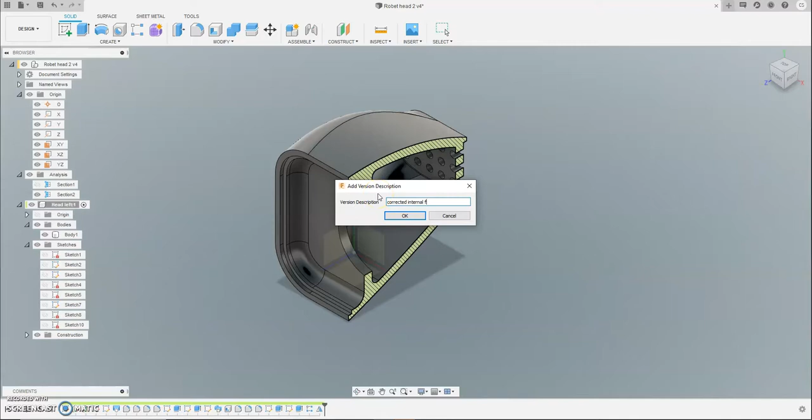Okay, so what I'm going to do now, if I look at my sketches, I understand you can't see them, but I'll put them up in a video, or perhaps as an attachment, I'll put the actual two-dimensional paper sketches on to show you, so you can have a look at what I'm doing as I'm doing it, and hopefully make a bit more sense.

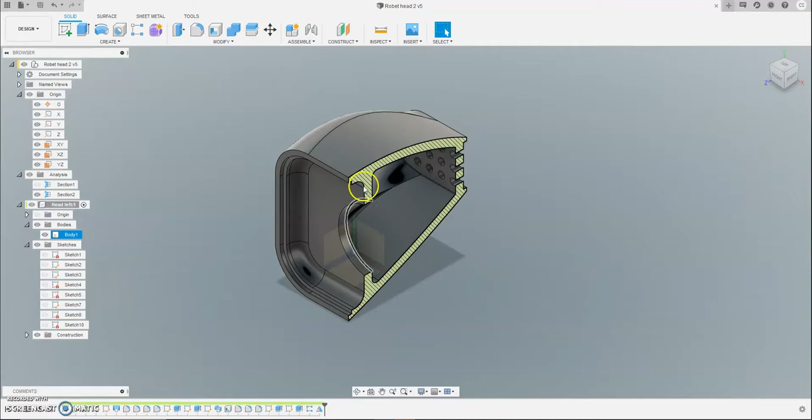From my model, I've got a fin on top of this. I'm going to switch off that section like that. I've got this fin.

I've got all these pop-ups, you know, mail coming in, great seasons, new trainers, get your Yeezys quickly.

I'm going to create a fin on the top and on the bottom.

Now, the fin on the top is going to be used for holding the two components together. So it's going to bolt through the top, so it's going to have a bolt hole through it. And again, that's going to let me show off my threads and threading conventions, and it's going to allow me to import from a CAD library the bolts that hold it together.

The one at the bottom is going to take or hold the bracket for the neck, so the neck is going to locate into that.

So I'm going to create it as a full shape before I split it, and then I'm going to split it down the middle. Now, I've tried this several ways.

Now, obviously, this curve here is a kind of compound curve. It curves both in this direction and in this direction. And so sketching onto it is quite difficult.

So I'm going to try it with a surface model, and that's going to get me another one of my techniques. Now, if you imagine a surface model, it's an infinitely thin surface, which I can then thicken and project. So that's what I'm going to try. Hopefully it'll become clearer as we go through it.

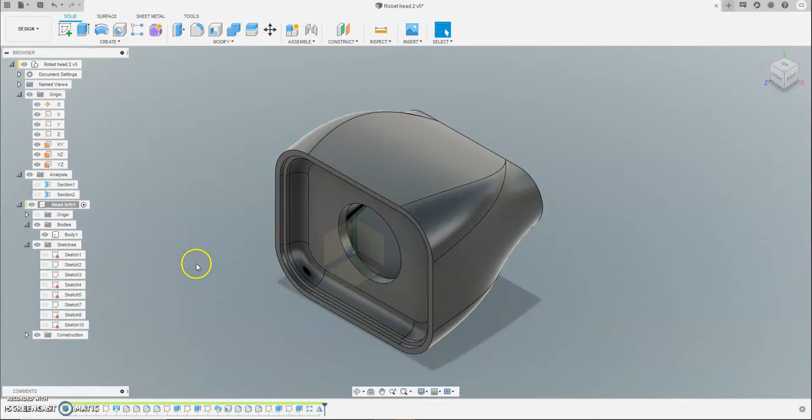So I want to create a sketch onto that center plane because it's going to sit in here. And I'm going to use a spline. Now I have different types of spline, and we can go into that in another video. Now the beauty of using a surface is that it doesn't have to be an enclosed shape. So I'm going to sketch out a spline.

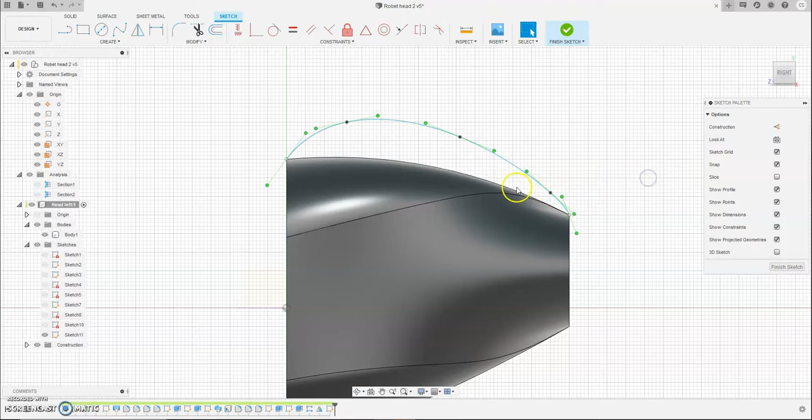Now this spline, when I click on it, it has these control points and it has these control handles which allow me to maneuver the spline to where I want to, like that. Now I have to be careful at this point because I want to make sure that is snapped onto the end of that object.

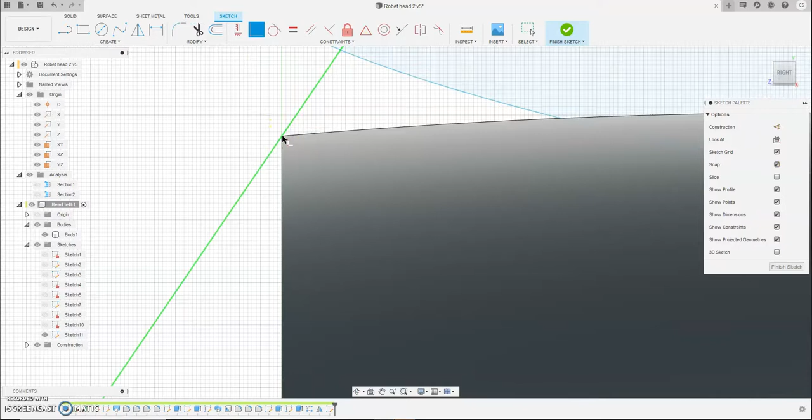Now you see what happened there? That's not good. So I want that point. Let's have a little look. Let's go back. I want to make sure.

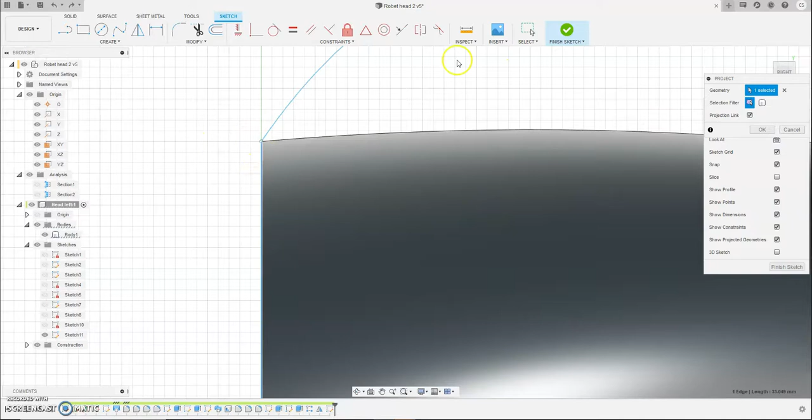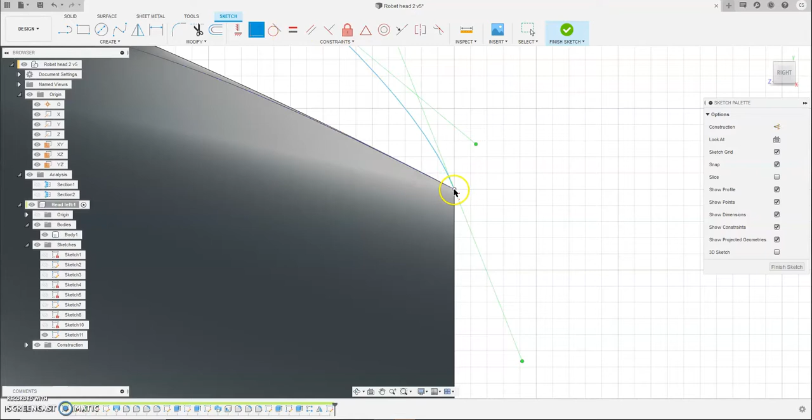So I'm going to hit P again, and I'm going to project that surface, and I'm going to make that point clip on to that surface. So that's constrained onto there. And then I'm going to do the same at this side. I'm going to constrain. That's P for project. And I'm going to constrain that point onto that edge.

Like that. Now this is where people are starting to go, oh no, don't do that, do it this way. Now I'm quite happy, I'll leave the comments open on this, and I'm more than happy if you've got a better way of doing it, definitely let me know.

Obviously, what I would traditionally do would be close that shape in here, and I might actually end up doing that inside the object.

So I'm going to change from my solid modeling into my surface modeling, and I've got a series. It looks very similar, I can do the same, I've got the same sweep lofts and all that, but I've got new things like patch and ruled and stitch. And we'll go into that in more detail when we make the body, because we're going to make the body using surface modeling.

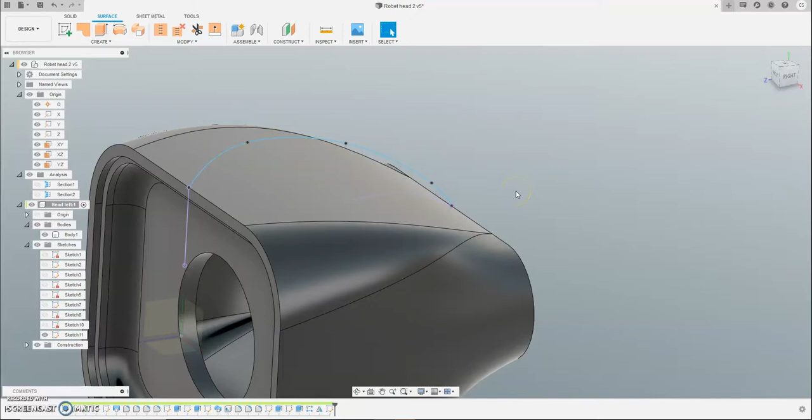So I want to extrude that so I get a surface. Now, at the minute, it's only going in one direction. So like an extrude, I want to do it symmetrically. I can make it symmetrical around the middle like that.

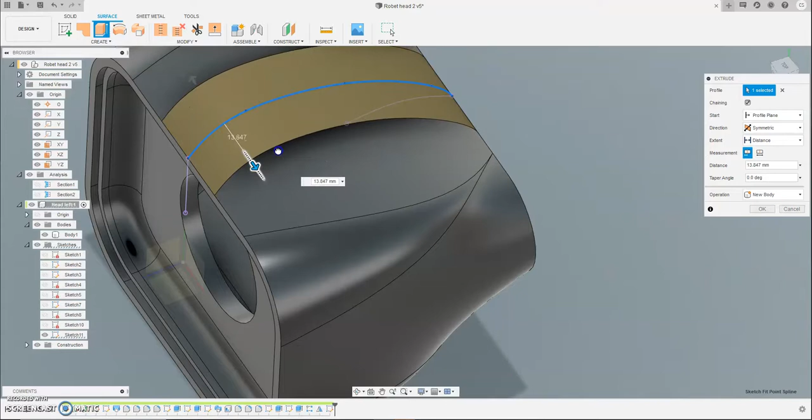So I'm going to create a surface like that. So it's another one of my techniques, and that's one of the reasons I'm doing it. So I've got this solid surface. Now there's nothing to that surface, it's just a thin surface. It's like a sheet of paper stretched over the top there.

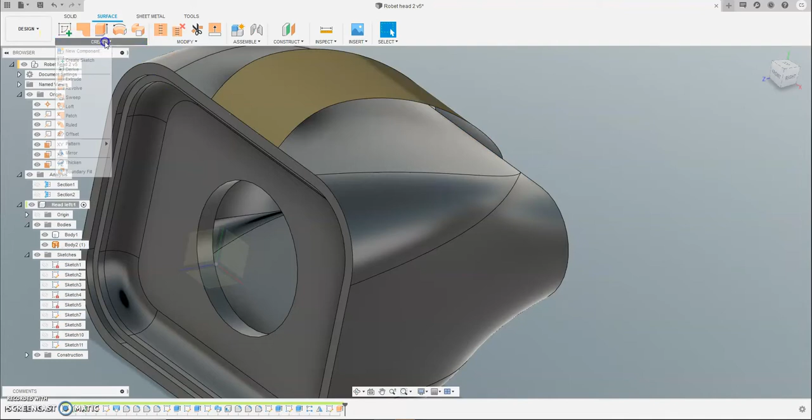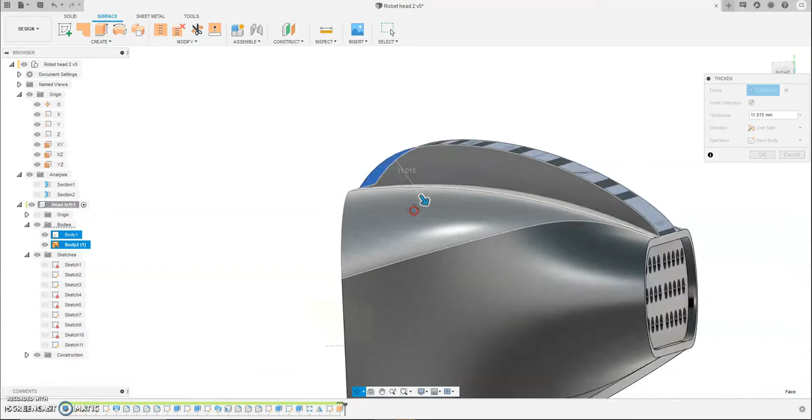Now what I can do with that is I can thicken it. So if I take that object, I can go into my create, and I can go down to thicken. And what that does, it will thicken my sketch. Now you can see it's got this kind of interference pattern on the surface, and it will thicken my sketch like that. Now that's quite nice for handles and things like that. Now it won't allow me to go. Now you're like, that's fantastic, that's exactly what I want.

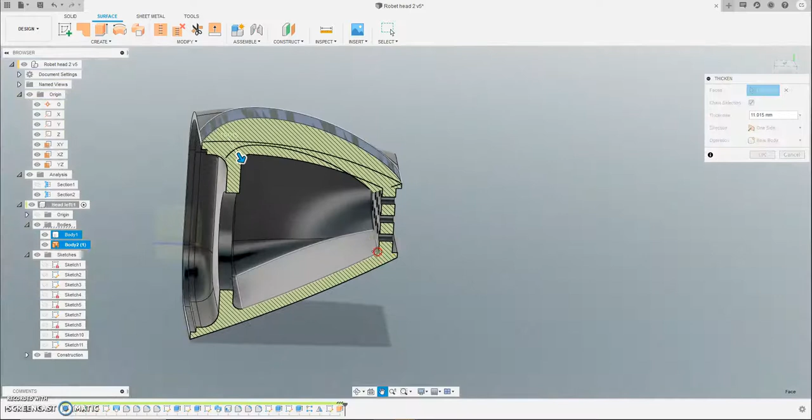But now the problem is, let's have a little look inside. So I've got an issue with it inside - it's actually come into my object. Let's have a little look at the analysis of that. Let's take a cross section off that. We can see that to get that down far enough, I've had to extrude it inside the object.

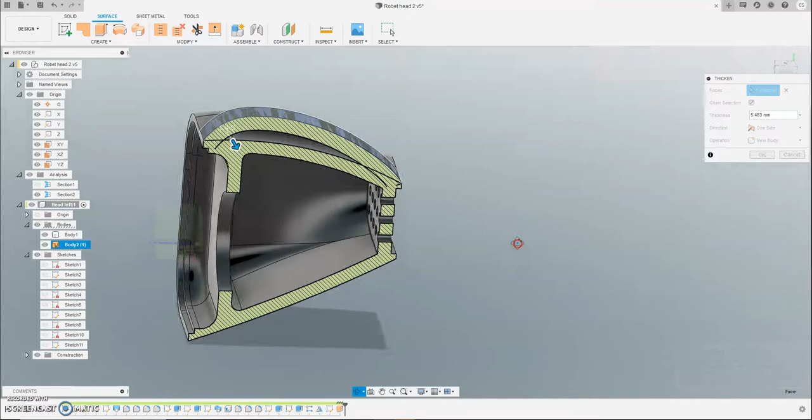Now that's not fantastic. I could go around and play around with this, bring this in, and I could have that, or I could just have it inside like that. Now if I did that, see the problem is I then have this other bit of material, so it's not very nice. But the reality is you would never see it.

But I don't like that. I think that's quite ugly, and it's almost at the point that we're just using that technique just to get it in. We're trying to tick that box, and it's not really what we want to do.

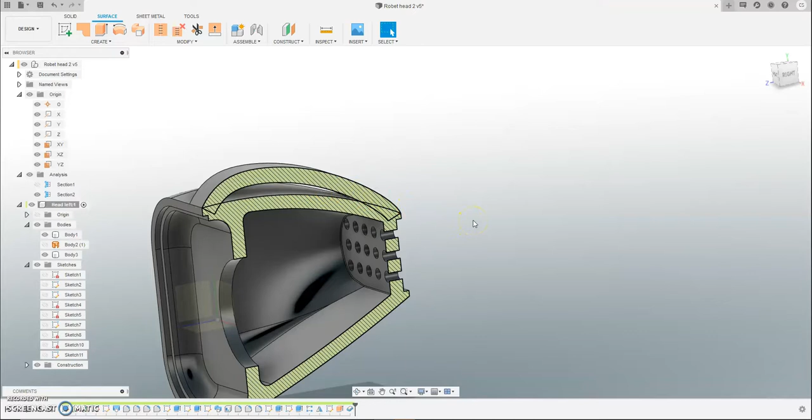So what I'm going to do is get rid of that thicken. And oh man, where's it gone? Where's the sketch gone? But the sketch is still there, it's just switched off. When you delete the feature, the associated sketch remains, but it just stays in this kind of sketch folder for this particular body.

Now you can also see that it's generated this other body. So we've got body 2, body 1. Body 1 is that, and body 2 is that. But you can see how the icon is different - this is a solid body, so it's got this grey cylinder, whereas this is a surface, so it's got this surface body, which is like an orange surface like that.

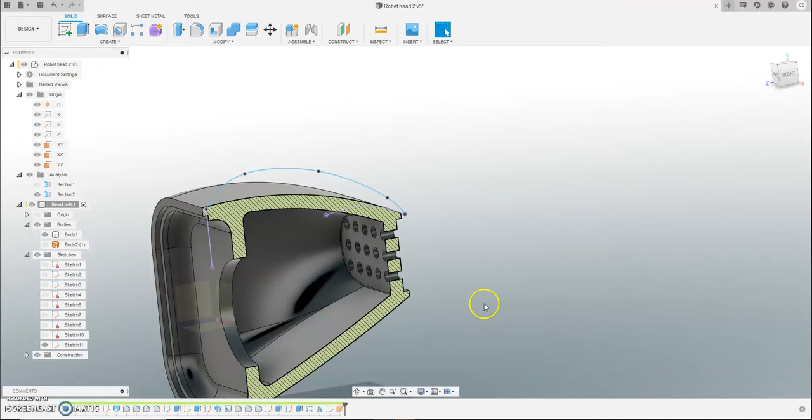Now what I'm going to do is come out of that, and I'm going to cheat a little bit. I'm going to complete and close off that section in here, make this an enclosed region so I can then extrude it. Now let's have a little look.

So I'm going to go back and delete that body, and go in and edit that sketch. So this time I am going to sketch, and I'm going to use a spline, but I'm going to use a control spline, and what I'm going to do is very carefully, not that carefully actually, sketch out that point.

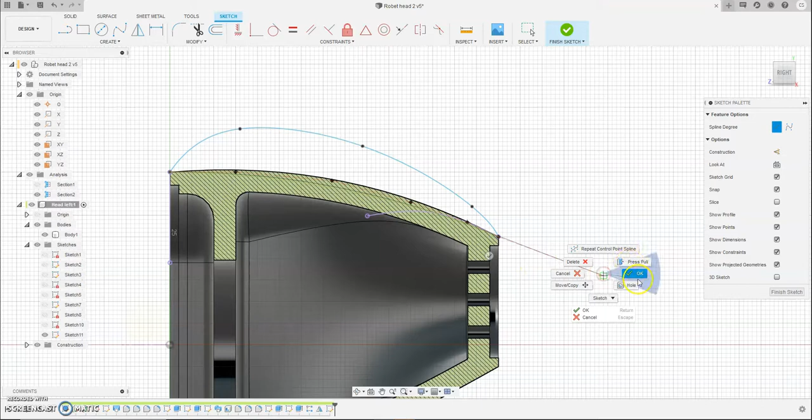Now I can alter that so it fits better by dragging them into position.

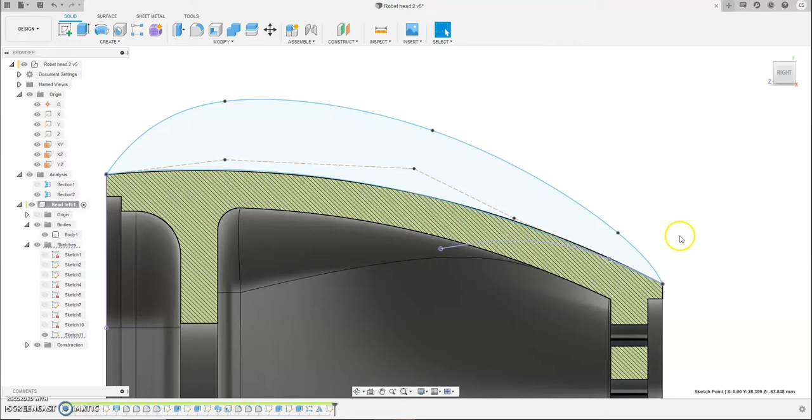Now I'm sure someone's going to put an email or drop a comment in the bottom saying, oh, do it like this, do it like that. More than happy to take on anyone's advice. As I said, I've been using this for 7 weeks now, so I'm not claiming to be an expert in any way at all.

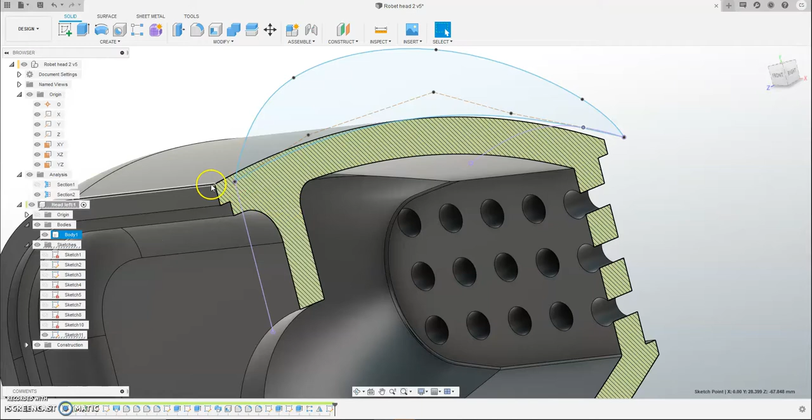Now we can see that looks good. Now it looks funny here because obviously my extrude is, I've sectioned this back further than that, so it actually follows through onto there. So I'm happy with that.

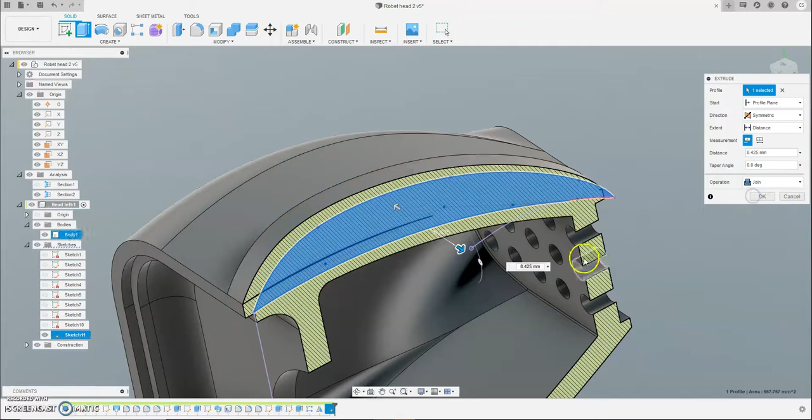Now I can treat it like any other extrude, so I'm just going to extrude that, and again I'm going to do it on 2 sides. In fact, I'm going to do it symmetrically, and drag that out. Now at this point it looks a bit funny because it's a cut for one, so I'm going to add that as a join, and it's also running through this section bit.

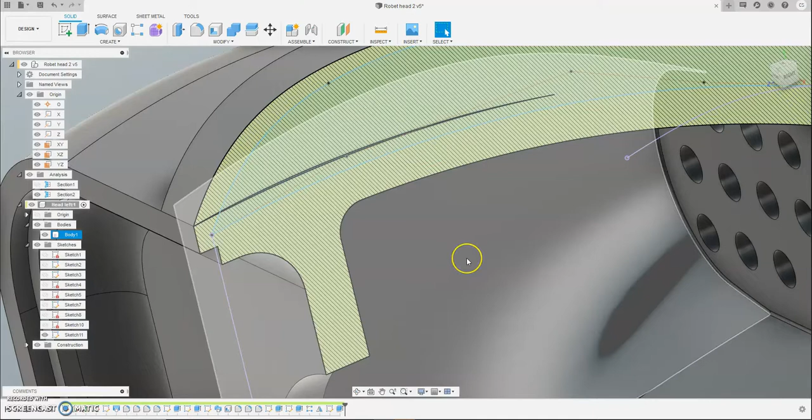Now let's just say, okay, let's give this a size to start with. Let's call that 10. Now I can see that I'm going to have problems with that, yeah, because with the way that I've drawn it, I have this little slice in here.

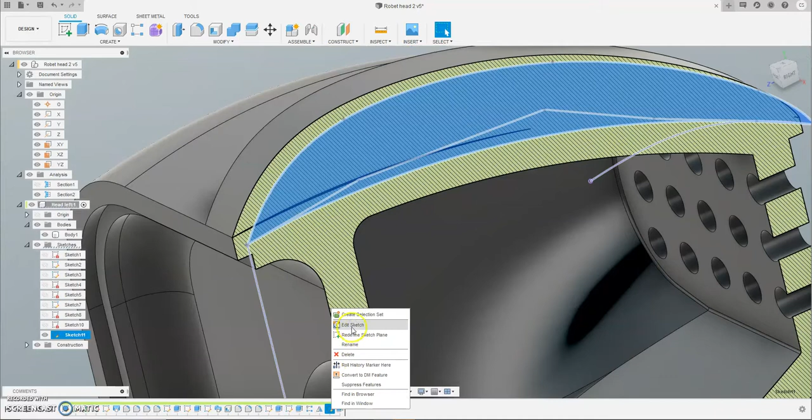Now I'm going to take a print screen of that, and pop it into here. And I'm going to go back and try and fix that. So to fix it, I need to go back into that initial sketch. So if I edit that sketch, I can actually see, if I look there, how that's just not right.

I actually wonder if I can just project that edge. No, I don't know if I can. Anyway, so let's have a little look, see if I can bring that down onto there.

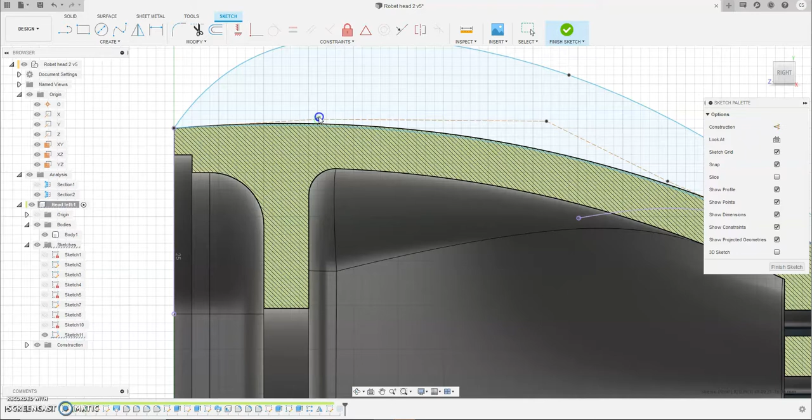And let's see if that's made a difference. That's better - it's now one solid component. Do I still have a little problem there? Well, I've still got a little problem at the front there.

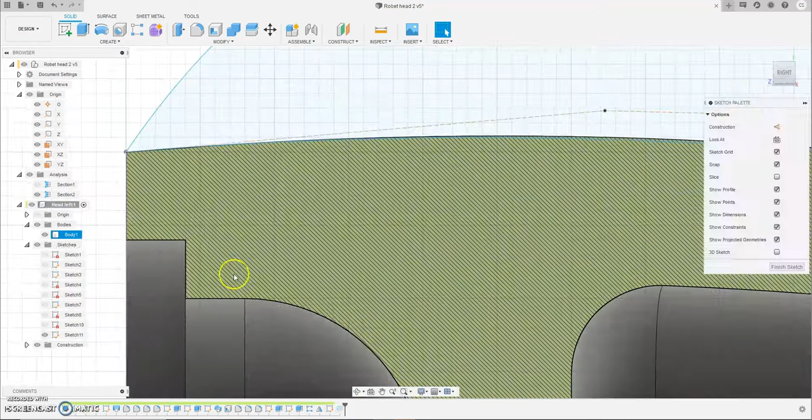Obviously my constraint didn't really work, so I'm going to go back into that sketch again. And I'm going to bring that... make sure. There we go. So that's much better - a nice solid.

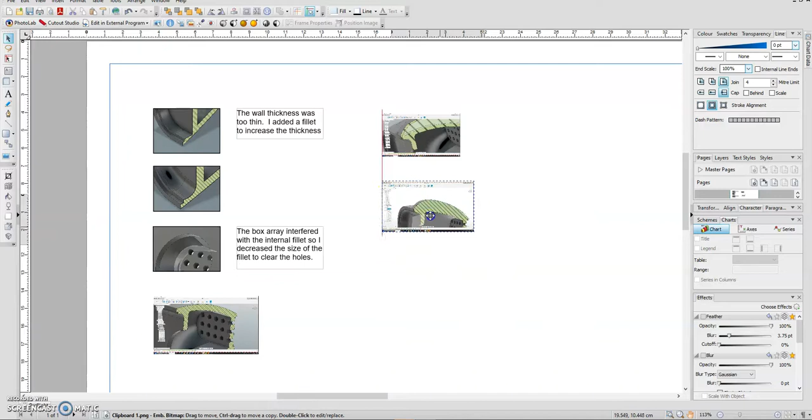So again, I'm going to take a print screen of that and put it into my drawing. Now I'm quite happy to hear a better way of doing that, more than happy to listen to you. That was quite clumsy.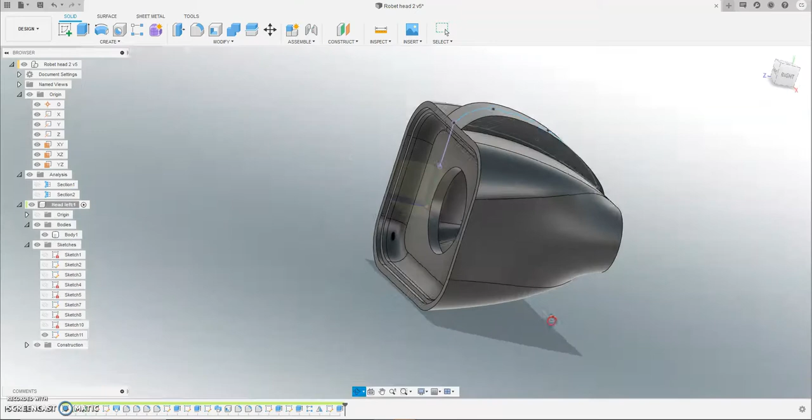So I have my feature on the top, and what I'm going to do is make the same feature on the bottom as well. So if you join me in the next video, I'll have the top one and the bottom one completed. Thank you.